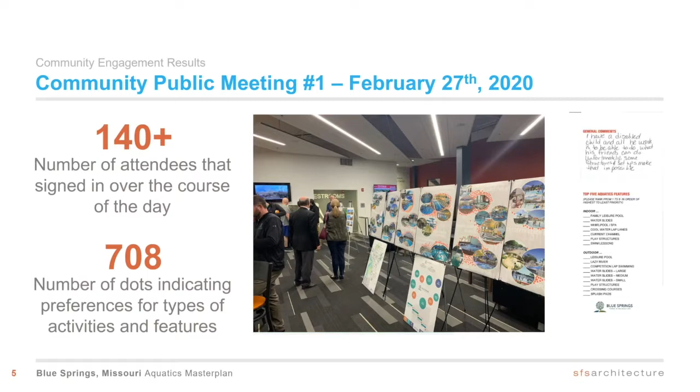The results were really the top 5 features you see here with stars next to them. Important things were indoor multi-generational lifestyle pools, indoor therapy or wellness pools, spas and whirlpools, an outdoor lazy river, and zero depth beach entry. That's from the visual preferencing.

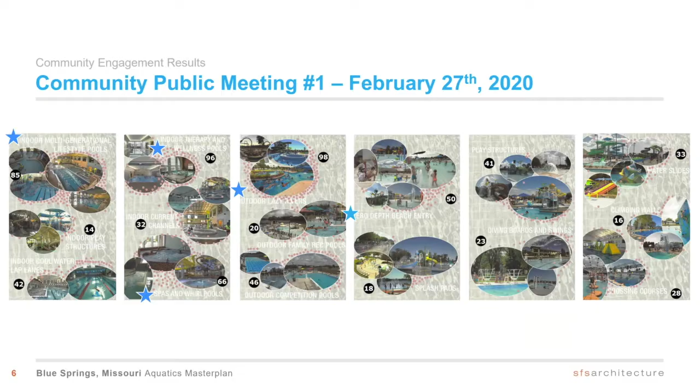This information we use in combination with online and statistically valid surveys to validate what we hear from public meetings. One survey was the online Survey Monkey, out and available to the public from February through April, with 12 aquatics and parks related questions. We had just shy of 200 respondents, but we did have good coverage through the geographic area of Blue Springs.

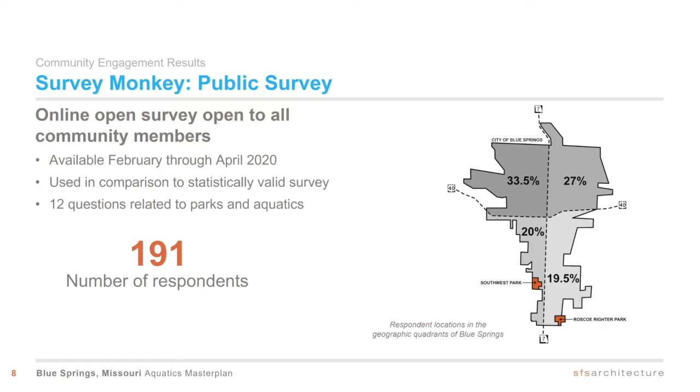The statistically valid survey was executed by ETC Institute, a firm that specializes in this type of thing. This goes out to very specific demographics to make sure they get a good cross-section of the community and feedback from all different demographics in Blue Springs. They guaranteed 400 respondents to hit a 95% level of confidence, and they actually received 502, which was a good response rate.

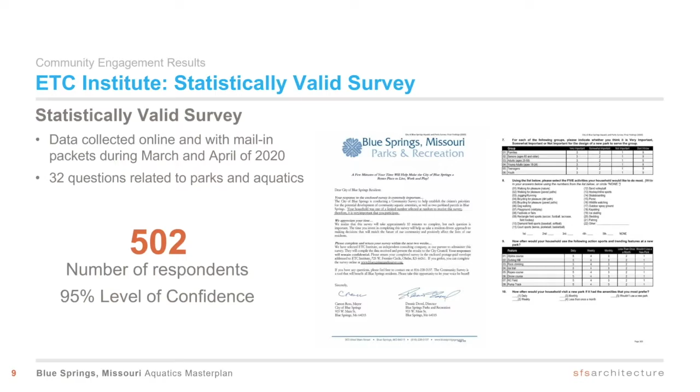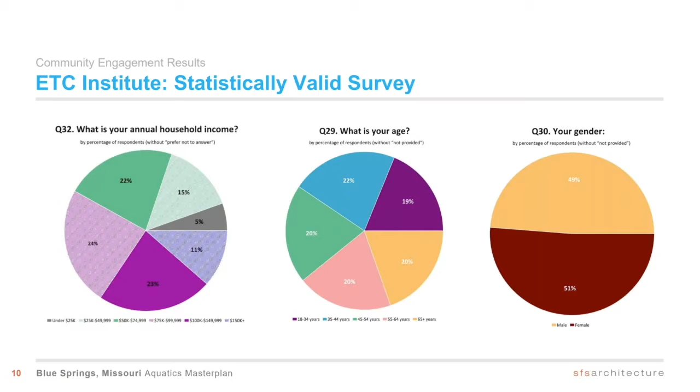I'll breeze through these slides just to show the demographics and the distribution across the community met all of the goals of that statistically valid survey.

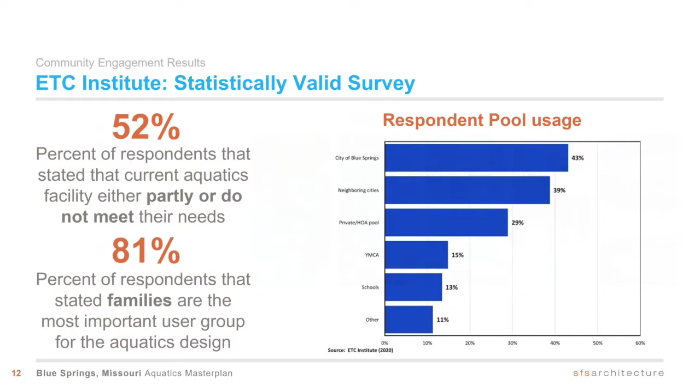What that survey ultimately showed, and what the community meetings and online survey all corroborate, is that there's a high level of support, not just for parks and recreation in general in Blue Springs, but specifically for aquatics features. That speaks directly to the fact that Blue Springs does not have a municipal aquatics center currently.

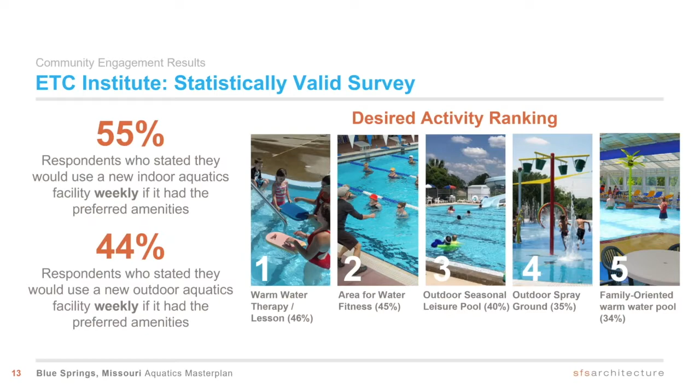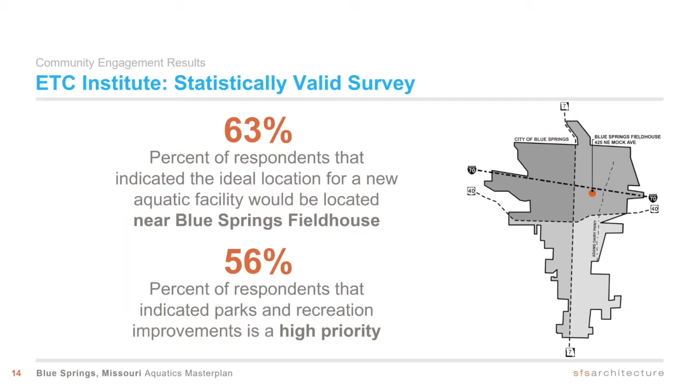Another question asked was basically what's the recommended or preferred ideal location for a new aquatic facility, and 63% of respondents in this survey said adjacent to the Blue Springs Fieldhouse. We think that's important because it feeds directly into the city's goals of developing an aquatics amenity for the community that's not just exciting and fits the community's needs, but is also financially sustainable and successful.

Sounds great, can you hear me okay Brian? Sure can. So the role that Ballard King plays in this process is completing the market assessment - looking at the demographics of the area, alternative service providers, assisting with input on what should be included in the facility, and then the operational plan. So really providing the city with a broad picture of what to expect short-term and long-term as it relates to adding aquatics to the Fieldhouse location.

The map you see here is a combination of the City of Blue Springs boundaries and the school district boundaries. In many cases we use a combination of those if they're not congruous to identify a primary service area for a project like this. How we define a primary service area is the distance people are willing to travel, at least on a minimum of a weekly basis, to use facilities and programs and services provided. That's not to say you won't have people outside that area travel to your facility, but this identifies what we base our primary membership and admission revenues from.

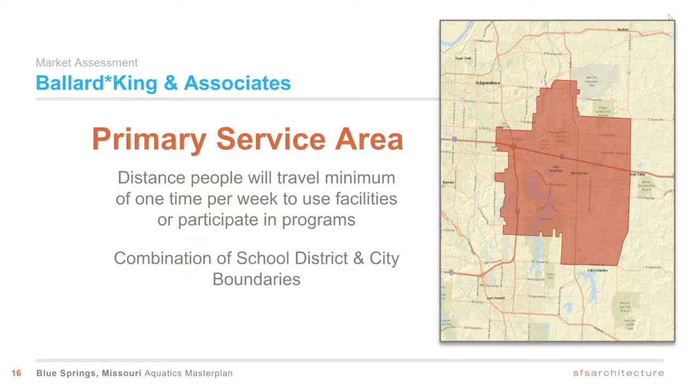When we look at that primary service area, you have approximately 99,000, almost 100,000 in population. Typically when you're looking at a primary service area, you want a minimum of 50,000 people to make a multi-purpose recreational facility like this, which includes aquatics, successful.

And you're growing - it's something everybody's saying duh on the other end of the phone. But we want to point out that from the 2000 to 2010 census, you had almost a 22% increase, and we're anticipating maybe not the same level of increase, but you're continuing to grow. The median age points to a younger population with families and children.

Aquatics is unique, swimming is unique. It's something people can participate in from birth to grave, right? You can participate at any age, but typically community recreation centers - full service ones that are successful - are those that have a community with a higher level of families and children, because they're significant users of services.

And lastly, we identified that approximately 38.8%, almost 39%, of the households in the primary service area have children present. So it backs up that lower median age.

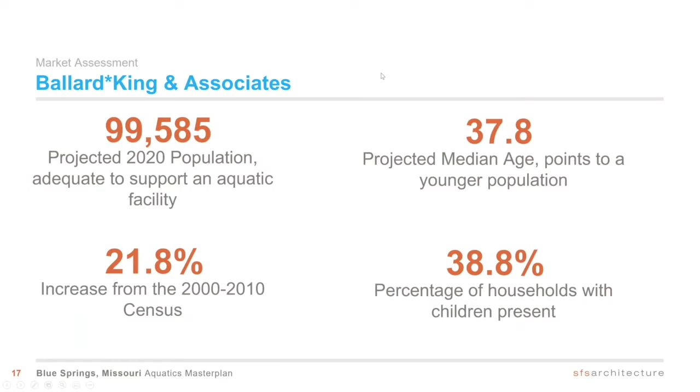When we discuss the idea of how many people swim or come to the pool, we try to use good statistical data. The data we use is produced by the National Sporting Goods Association and their annual survey of how Americans spend their leisure time. So based on the median age of the community, the age distribution, your geographic location - you average those three together, plus the national average for participation in swimming - and it equates to approximately 16.4% of people participating in swimming or going to the pool.

When we apply that to your population, it comes out to approximately 14,830 people over the age of 7 participating in swimming. When we take that information one step further and look at the number of times frequent users, occasional users, and infrequent users use an aquatics facility, it comes up to roughly 666,000 swimming visits on an annual basis.

Now those are not necessarily specific to a facility within the primary service area - those pool visits, swimming visits, can be spread out over the country, over the globe to be honest with you. It merely identifies a market for pool visits within your primary service area, and that is a significant number. The other important thing we've done through this study is identify the other pool providers in the area.

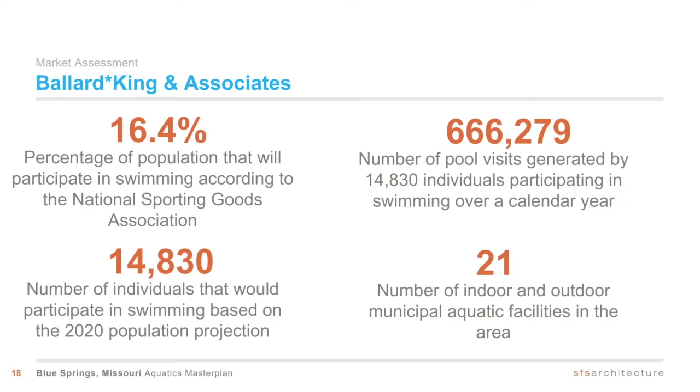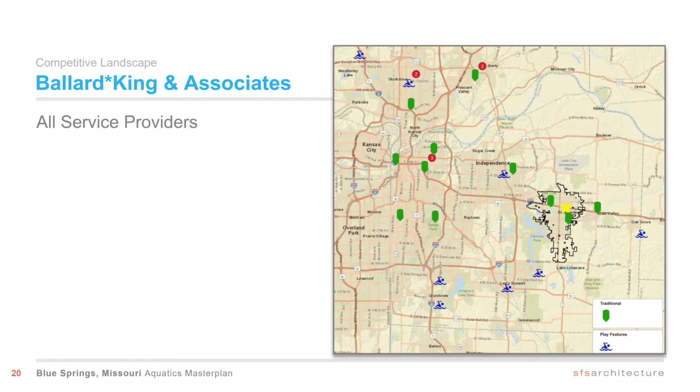Putting the alternative service providers on the map, the star illustrates the potential location for the aquatic center next to the field house, and the blue dots with little swimmer icons identify other aquatics facilities in the area or nearby, so we're not planning this in a vacuum.

The green dots represent what we call a traditional pool—meaning a rectangular lap pool, either 25-yard, 25-meter, or 50-meter variety.

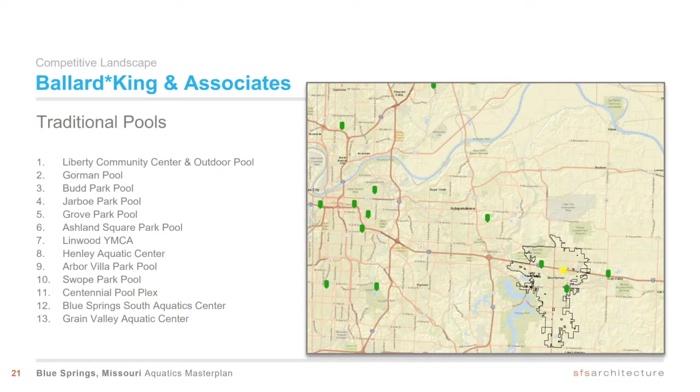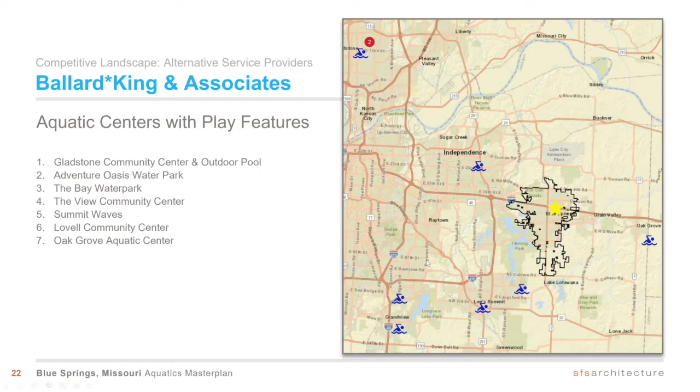That concludes where we're at with the market analysis. As Brian mentioned earlier, our next steps in this process, once we've narrowed down the concepts, is to put together an operational plan.

I'm going to stick with just the two concepts shown at that first community meeting for this recap—basically a couple of different indoor concepts, including a spray pad versus some shallow water and some slide alternatives.

Some of the feedback we heard on these concepts included questions like, is a double FlowRider really necessary? And concerns about the slide complex meeting our budgetary constraints on this project. So tonight we'll show essentially the same concept, but with features that more realistically reflect the budget, allowing the city and everyone some flexibility in how those things are realized in the future.

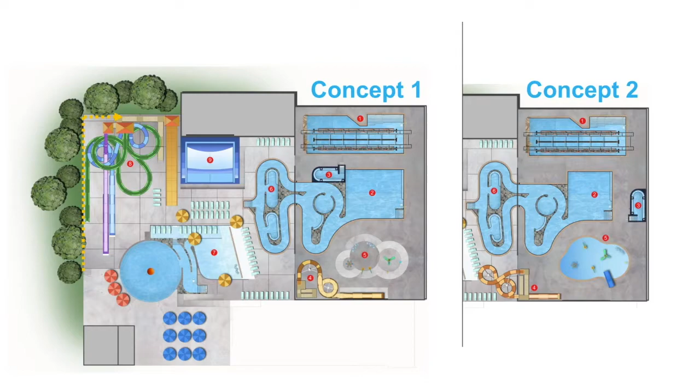So I'm going to go right into our refined design concept.

Architecturally, it's the same as what was presented at the last community meeting. So rather than summarize that and then have to go back through, I want to just go through that now as part of tonight's content.

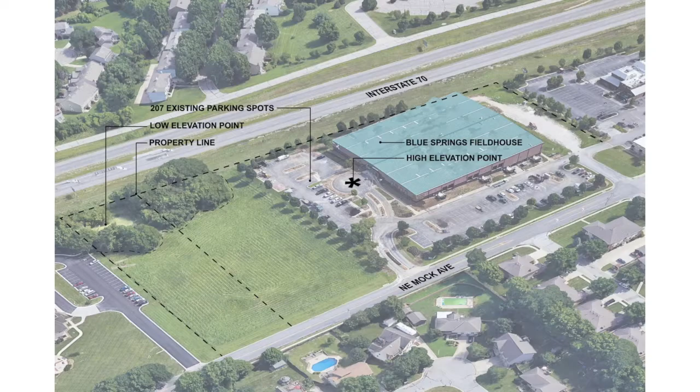So some of the issues and opportunities we've identified with the existing fieldhouse, on the right side of this graphic, include expanding the building to incorporate a new lobby space and support facilities for the indoor aquatics just to the west of the existing fieldhouse. We'll see in more detail how those pieces come together.

We're able to incorporate about 265 total spaces in this current layout, an increase of a little more than 50 spaces total. We haven't really packed the site full of parking, so there's still the opportunity to maybe pick up 5 or 10 more spaces, but we think this is an adequate amount.

Again, considering that the peak demand for parking at the facility is during the winter, the outdoor aquatics would not be taxing that parking lot nearly as much.

So, a couple of opportunities: I-70 to the north is a great opportunity for visibility, as well as a great opportunity to have an iconic view of this building and identifying Blue Springs along the I-70 corridor.

We have this adjacent property to the west that could allow for additional parking expansion if that was ever entered into a partnership or acquisition.

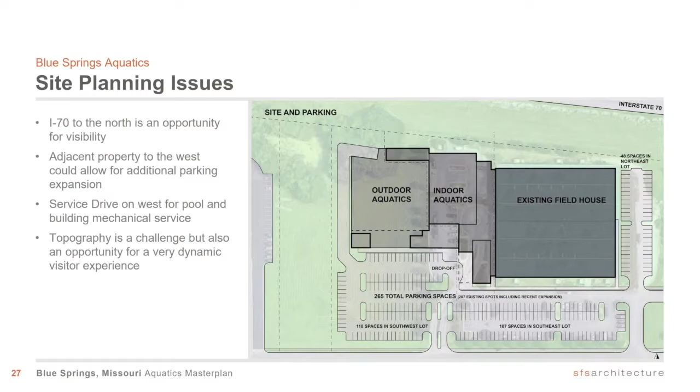A service drive on the west for pool and building mechanical service lets us tuck all of those back-of-house spaces up along the north side of the site. Topography is definitely a challenge, but it's also a great opportunity to create a dynamic visitor experience and views into and out of the aquatics.

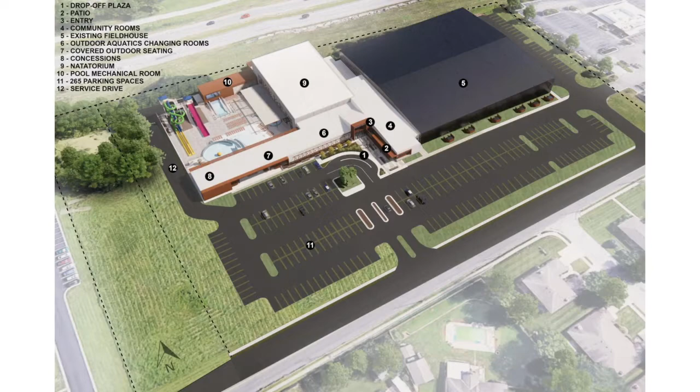So here's what that looks like in a three-dimensional rendering. You can see the Blue Springs Fieldhouse is this dark gray box on the upper right-hand side of the screen. We enter into the facility in a new lobby space right here at the corner, off of a new drop-off plaza. We'll see more detail of what happens in and around this space in a few moments.

The outdoor aquatics support facilities are located right here. In the spirit of developing a concept and potential project that is not just a seasonal use facility, as much as possible we're looking for opportunities to do things that are both unique and extend the usability of different parts of this project throughout the year.

So what you see at number 7 is a covered outdoor area that during the summer swim season is part of the outdoor pool complex. But during the shoulder seasons, say from March through May or late August through November, we have the ability for a new outdoor covered space, and we'll see some details of that in a moment.

Number 8 is our concessions and guards and staff space for the outdoor aquatics. Again, more of a seasonal use, but if we can connect it to something usable in the fall and spring, then we can extend the use of that space and its revenue generating potential as well.

You can start to see the outdoor aquatics and some of the components there that you'll see in more detail shortly, as well as the indoor aquatics, this large massing here at number 9. And then you can just start to make out a roof that would overhang a portion of the indoor/outdoor aquatics, which we'll see in more detail shortly as well.

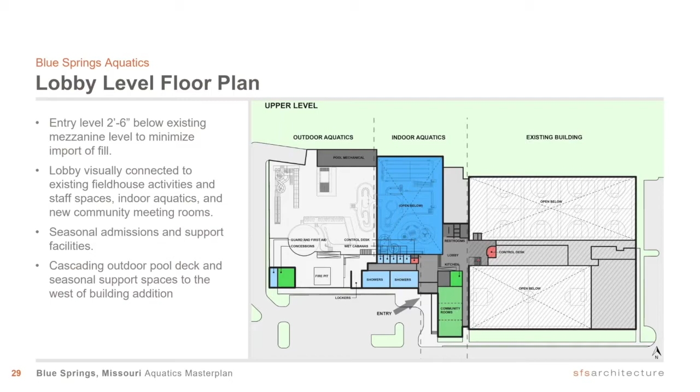The existing elevator would be maintained as the accessible means of movement from the upper level down to the lower level. The existing control desk would also be maintained, connected to the staff areas in the field house today. To get into the indoor aquatics, you would descend the stair right next to the control desk, arriving at a level on the lower level, roughly in the same location as the current men's restrooms on the lower level today.

The women's restrooms—because we're going to accommodate all new changing facilities adjacent to the indoor pool—all of these spaces can be opened up and reprogrammed or reused for other activities relative to the field house in the future. Those are unallocated at this point.

There's a long corridor that connects to the changing facilities for men and women down here, and a corridor that extends into the indoor pool area for family changing rooms and family lockers. Again, when you get to the bottom of the stairs, you have a clear line of sight to the indoor pool, and a connection from a party room that could be used for birthday parties, adjacent to and visually connected to the pool.

This could also be used for lifeguard training or other aquatic-related meetings or training activities. There's a sauna shown between the family changing rooms and the guard room and manager's office in this area, and then just a small custodial space there as well.

Soon I'll be turning it over to Doug to go through the rest of the aquatics concept, but I'll highlight a couple of other key points here with the architectural layout and configuration.

Again, the dark blue space is about 15,000 square feet of indoor aquatics or natatorium area. That is comparable to and larger than most of the other indoor aquatics facilities in the Kansas City metropolitan area. A lot of facilities are right around that or a little bit lower on the large side of these types—so Olathe, Matt Ross, Lenexa, some of those newer facilities in the Kansas City metro area.

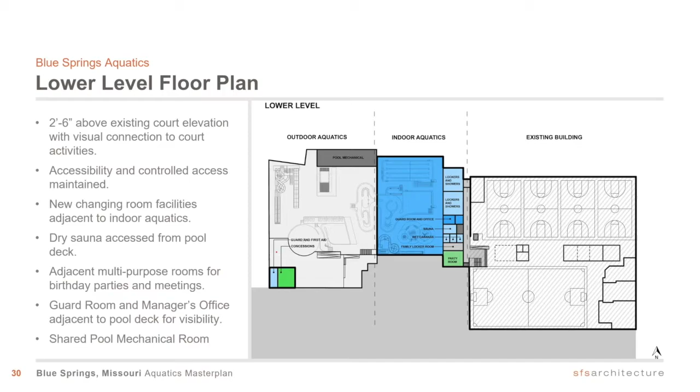And then also think about how staff has to control ingress and egress in this facility, and their visual connectivity. So with that, I'm going to ask Doug to step onto the line and review the aquatics concept in more detail. Hello, everybody, this is Doug Whitaker with Water Technology.

It's really about having a very unique and engaging experience. One of the things we wanted to make sure is that this place is very dynamic, so it has durable attraction value, and then has something for all ages at all stages. So one of the things we looked at is some of the fun things that people want to experience in a very multi-purpose recreation and aquatic center.

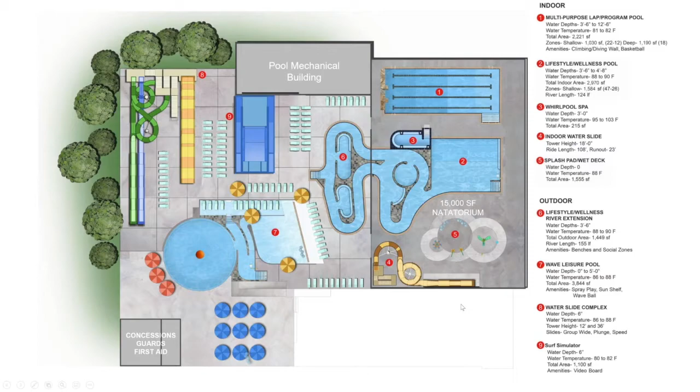One of the things I think is really important to point out is that one of the things we heard from community input was that people would like to see more lap lanes. Some of the earlier concepts had fewer lap lanes, and we used that feedback to help guide us to get more lap lanes. Yep, indeed.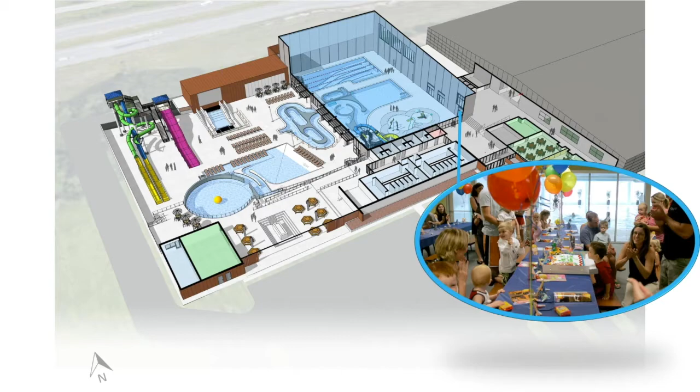So real quickly here, just to paint a picture of some of these features, I'm going to go through this relatively quickly, but it's just some images that start to highlight these spaces. As Doug mentioned, as you're entering the facility from the east side, from the field house on the lower level, that's the opportunity for the birthday party room. That is such a hot item and a great way for the facility operator and the city to generate revenue, but also provide a space for kids' birthday parties adjacent to the pool. It's a great image that shows that.

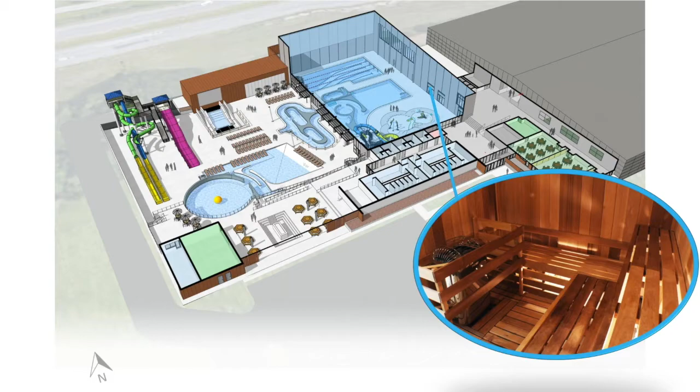The sauna, as we mentioned in passing, hasn't really gotten much airtime in our discussions, but that is something included here. It's important that we include those kind of adjacent to staff areas and make them visible from the public side.

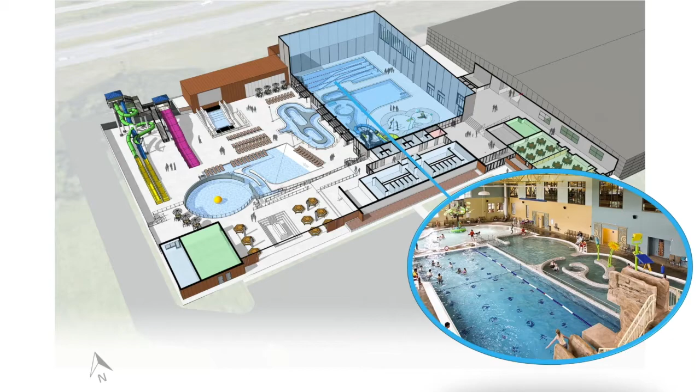This is the Olathe Community Center, and again, this is the same size surface area of water as what's being proposed in this concept. At Olathe, you see 4 25-yard lap lanes separating the cool water lap area from more warm water program space, which you see on the upper right side of the view there. This was to highlight the lap pool more specifically, and the opportunity to have a rock climbing wall and cliff diving area.

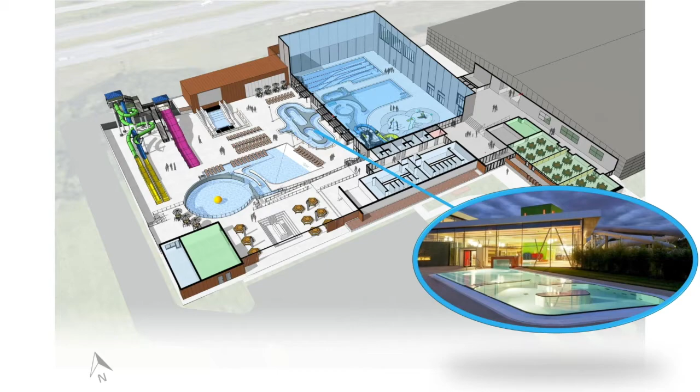On the outdoor wave pool, there's also the zero depth entry and the play area, so we have the opportunity to integrate some children's play features and give them a great location for fun on the outdoor pool.

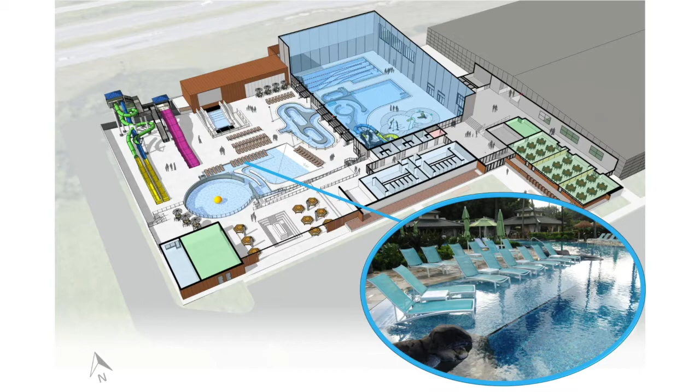The wet deck, as Doug mentioned, pulls some things they've seen on the hospitality side of the industry into the municipal side here. And there's a shot of what that wave ball looks like as it's being activated and starts its oscillations.

Our flow rider is another great example of a way for the facility to extend that season and generate revenue, potentially with some surfing programs and classes.

We just won't have palm trees in Blue Springs. We can do Palm Springs and Blue Springs. I don't know, yeah, palm trees.

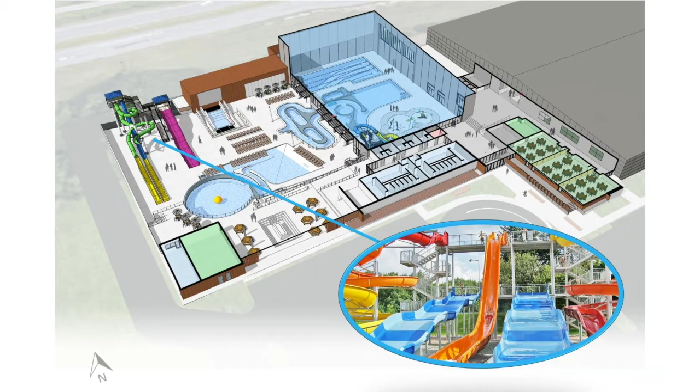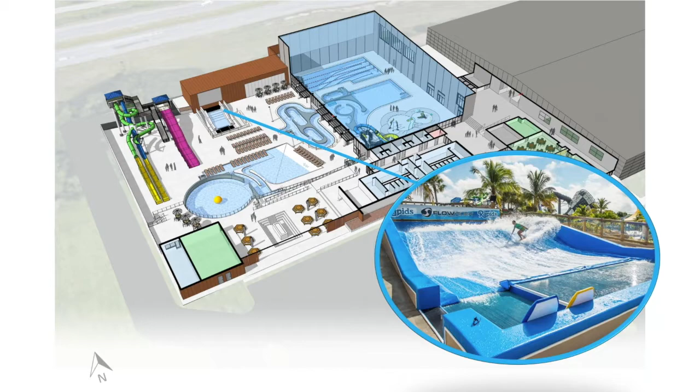The other interesting thing about that flow rider is the number of birthday parties you can do surrounding surfing, and there are also opportunities for unique memberships for people who are really good at that and don't want to wait in line, opening the facility early and being more than willing to pay a premium for that use. It also appeals to that hard to reach age group of teenagers who want to come to this facility just for that destination, but then they see all the fun activities and branch out.

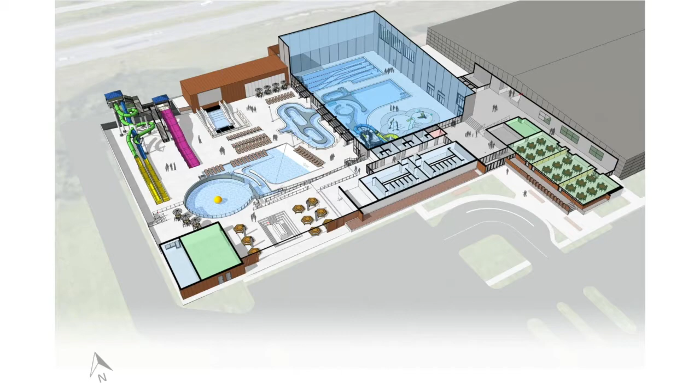Even in the wintertime, this area can be used as a gathering space for the concessions. Because of that elevation, we can secure the stairs or ramps down to the outdoor pool so that in the off season people aren't allowed down there, creating a flexible park atmosphere adjacent to the outdoor pool area.

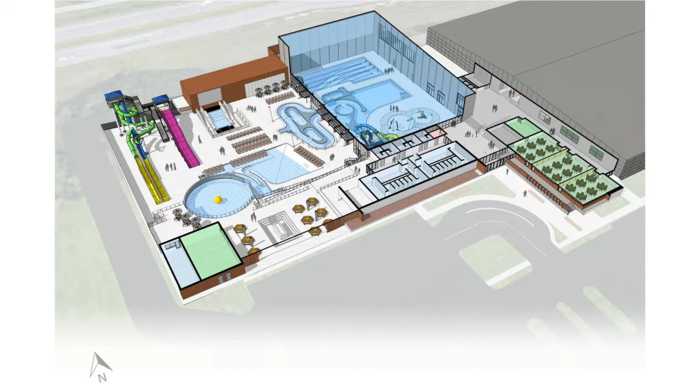We're almost at the conclusion of our presentation, and we have some draft renderings to further illustrate what this facility can look and feel like. We'll go through those here real quick, and circle back to answer any questions that have come up during the presentation.

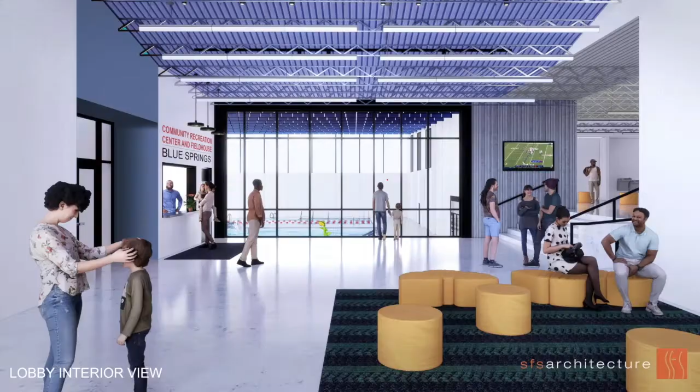As you walk into the facility, this is a shot of the lobby looking directly north. We have a large window so you immediately see the indoor aquatics component through it. On the left is the secured pathway into the outdoor aquatics support facilities and the seasonal admissions window. To the right, you can see the stairs that go up to align with the upper level, or mezzanine main entry level, of the field house.

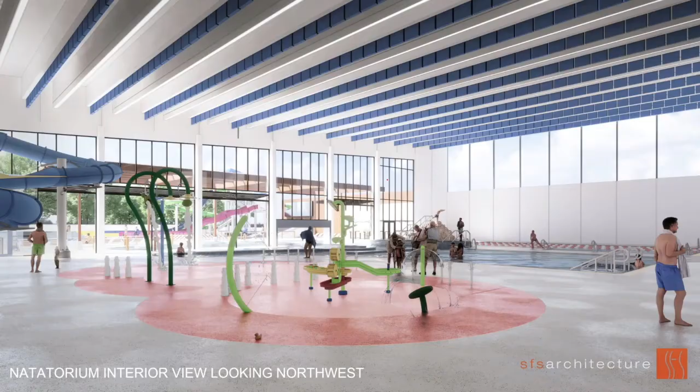As Doug was mentioning earlier, right when you walk into the indoor pool area or the natatorium from the family changing rooms or the party rooms, this is what you'd be greeted with. About a 1,500 to 1,600 square foot spray pad area. You can see the indoor slide off to the left, the warm water lifestyle pool in the middle of the space, and off in the distance, the 4-lane by 25-yard lap pool with some diving area at the west end. All of the outdoor amenities are visible through a large expansive glass wall with pivoting panels that allow it to flow from indoor to outdoor during the summer months.

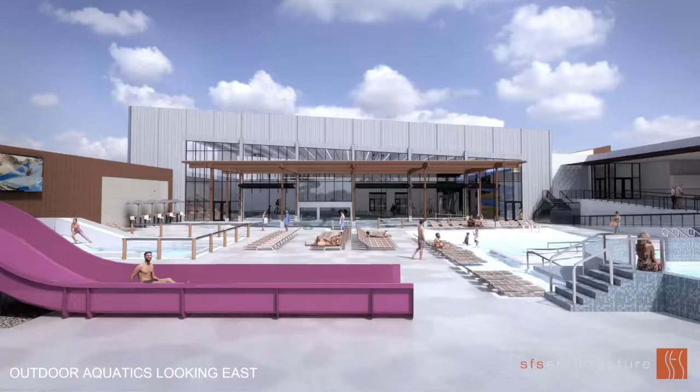Now moving all the way to the west end of the outdoor aquatics and looking back to the east, here you can see that family slide. This dad must have jumped down the slide before the rest of the family. You can see the surf simulator behind him, and that video screen we've talked about can show video of the surf simulator or other features in the facility, but can also be used for movie night at the pool, with people up on the concessions level watching, or for sporting events that people in the pool can see. A lot of different activities possible with that video screen.